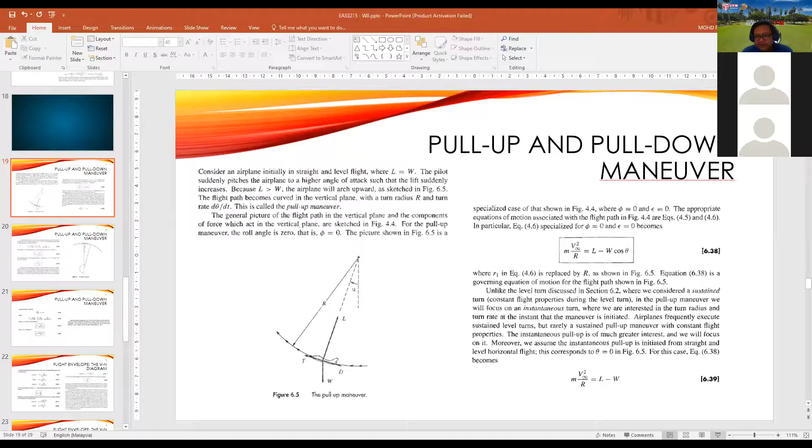Without further ado, I think we will proceed with my lecture. Okay, just to recap what we have before, what we covered last week - let's go back to the first slide.

In our last meeting, we covered level turn flight and pull up. I think pull up and pull down maneuvers we have not yet covered; we only covered level turn flight. For today, we will cover the other two parts, pull up and pull down maneuvers, as well as the VN diagram.

For the VN diagram, it is very, very important for you, not only to engineers but also to pilots who are planning to get a pilot license later on. If I'm not mistaken, two of your seniors, alumni from this program, became pilots - at least two that I know, one Chinese, one Malay. They took the pilot license, but I'm not sure if they ended up as pilots or as engineers - I lost contact with them.

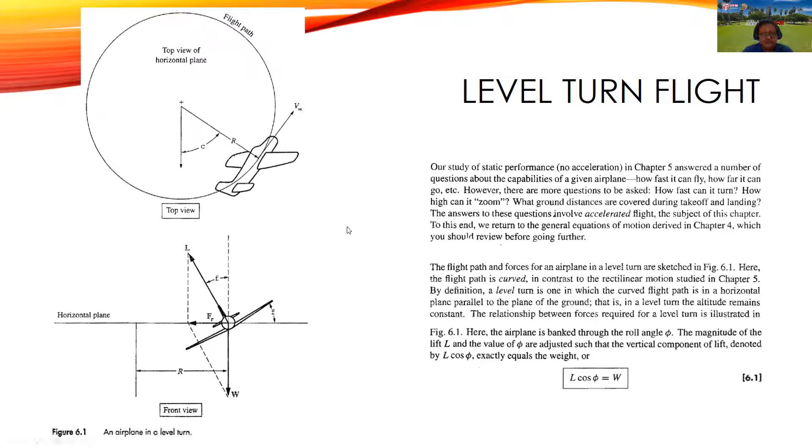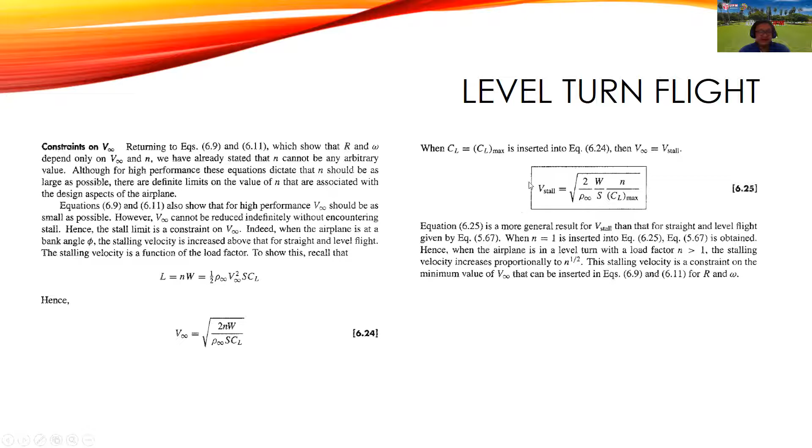Last week we looked into level turn flight - where the aircraft is turning without losing its altitude, meaning the aircraft is turning while maintaining its height. There are ways to determine the turn radius, the rate at which the turning progresses, the maximum load factor, and the minimum speed at that particular point. This is the V-stall.

Now we want to look into what we call pull up and pull down maneuvers. Consider an airplane initially in straight and level flight where L equals W. The pilot suddenly pitches up the airplane to a higher angle of attack such that the lift suddenly increases, meaning the lift is now more than the weight. Because lift is more than weight, the aircraft will arch upwards, going up in some sort of circular motion.

As we can see in Figure 6.5, the flight path becomes curved in the vertical plane. The altitude is increasing in this case because it's pulling up - the height of the aircraft with respect to the ground is increasing, with a turn radius of R and a turn rate of d theta/dt, which is also omega in this case. This is called the pull up maneuver.

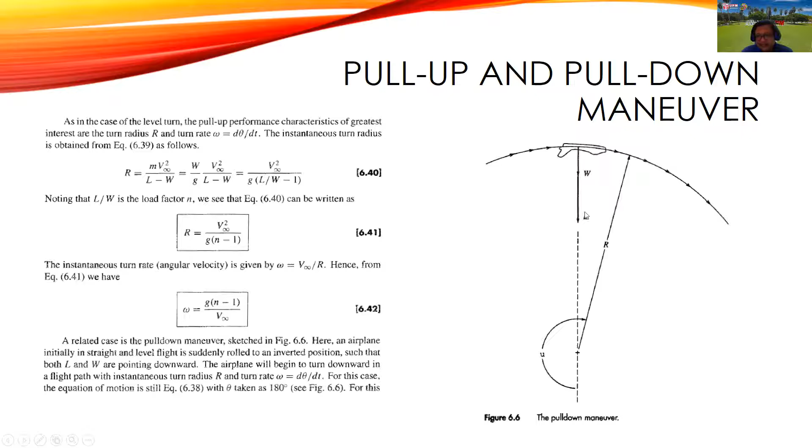This one is pull up. For pull down, this one is going down, right? The pull down maneuvers, the only change is the sign of N. Previously you see this is minus, N minus 1. But for pull down, if you work on it, because L and W are in the same direction, from here you rederive and you will end up with the sign here becoming positive, unlike the pull up maneuvers, which is negative.

As we can see before, when we talk about a level turn flight, this one 6.9, where was it? 6.9.

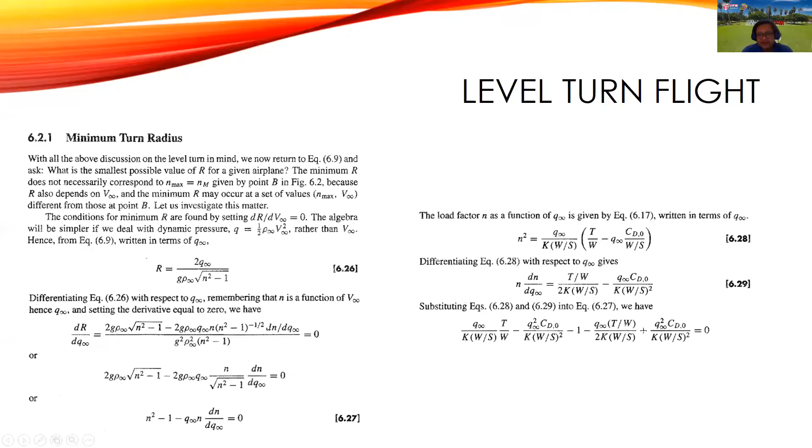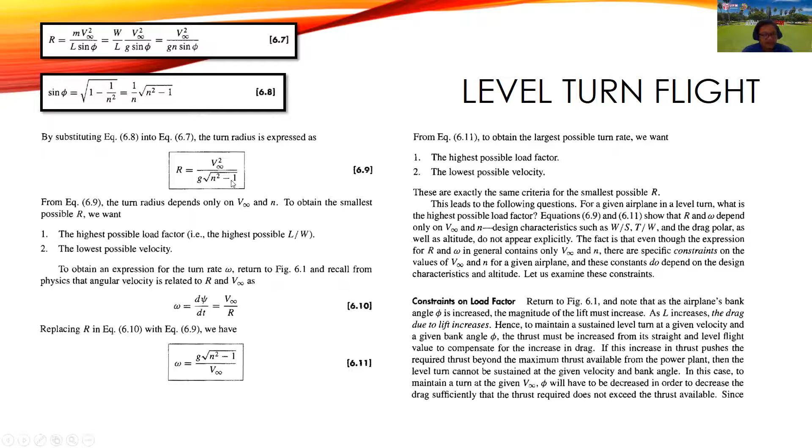Yeah, this one is for level turn flight. You have this equation, right? If you look here, n is to the power of 2, and you have a square root here. Okay, this is when you do the derivation.

But for this one, where is it? Okay, unlike the pull up and pull down maneuvers, you didn't have a square root and the power of 2. That is the difference between this and this one. And from pull up compared to pull down, you just change the minus into a plus sign.

Then in the limit of large load factor, these three equations reduce to the same form. If n is very large, it becomes very dominant, I would say. Probably the value is 8 or 9. So it doesn't matter whether you minus 1 or plus 1, the radius will not change that much. So you can basically simplify into this equation.

Similarly, consider the expression for turn rate for level turn, pull up, and pull down maneuvers as repeated here. This is for omega. Then, okay, level turn, pull up, pull down.

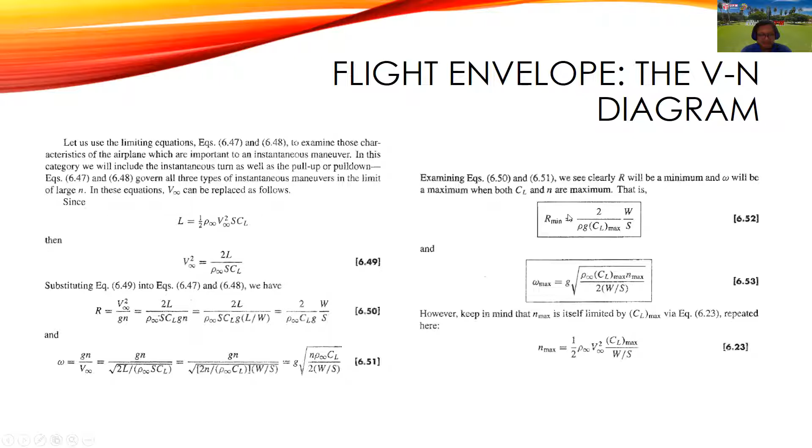Then, okay, now we want to move into what we call the VN diagram. This is nothing but on how to determine the minimum radius and also the maximum turn rate for that particular aircraft at that particular condition. Okay, when we are talking about the VN diagram, there are two things that I would like to highlight.

One is the limitation of the pilot himself or herself. Because we are human, we have blood vessels in our body, and when your body experiences a large G force, N is also G force, load factor, same thing. We're experiencing, let's say, a G force of 6, for example, or 9, then due to the inertia of the blood inside your vein, that will actually develop or make you faint, dizzy. At first probably dizzy, then finally you will lose control of your body and also the plane.

So that is one thing you must remember when designing an aircraft: you cannot simply design it to perform, let's say, n equal to 20. The load factor is 20. That is what we call over-design, because you don't need to design something that is way too much. That is a waste of money, waste of time, waste of effort. That is not practical, because a human cannot sustain more than 9 g-force.

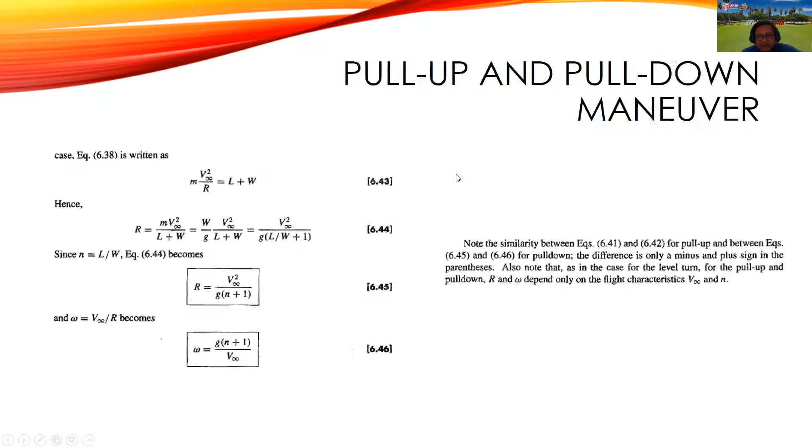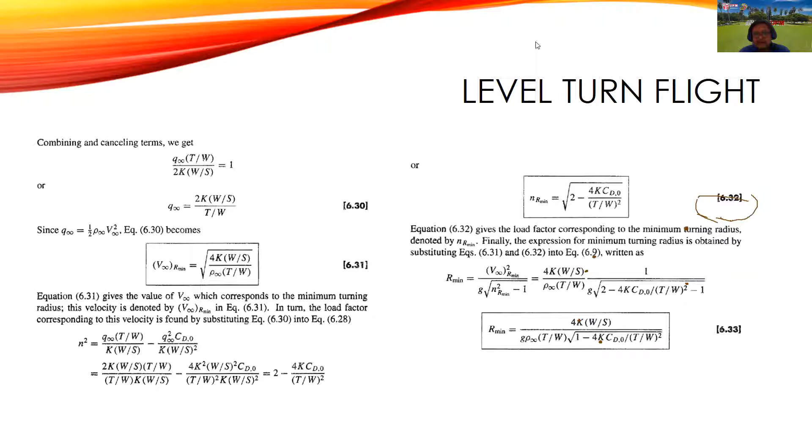Okay, that is the things for the V-n diagram. So that is the V-n diagram. I have a video here.

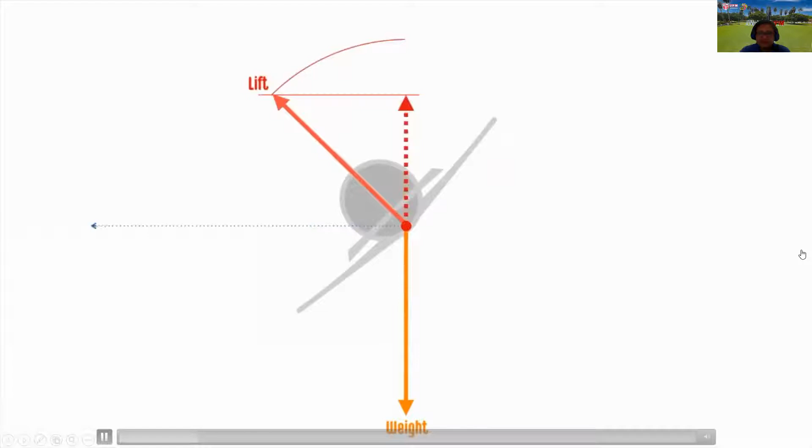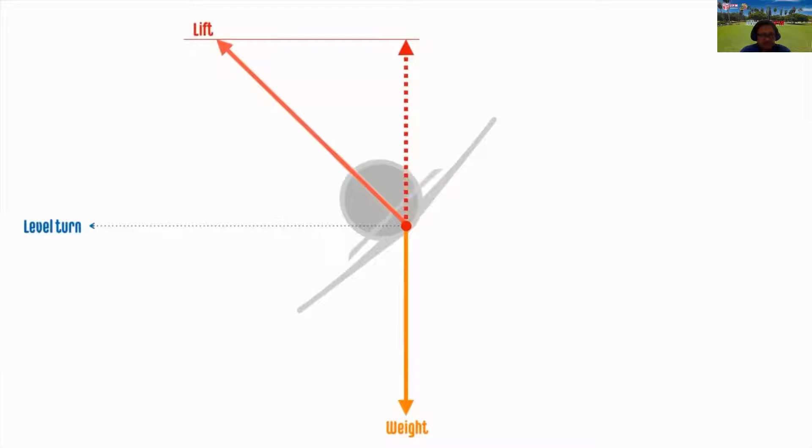In straight and level flight, lift equals weight and the load factor is said to be 1. In a bank turn, the vertical lift component that opposes weight is reduced. To maintain the turn without losing any altitude, the pilot must increase the angle of attack to generate more lift. This increases the loading on the wings and increases the aeroplane's apparent weight.

So in this particular moment, as I explained earlier, this is where your load factor acting on the aircraft is higher than 1.

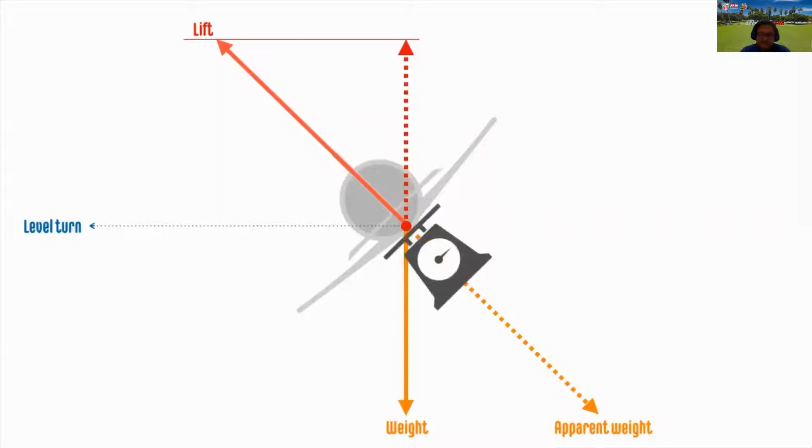So if you could put a scale under the aeroplane, it would show more weight. This is due to the centrifugal force acting on the aeroplane outwards from the centre of the turn.

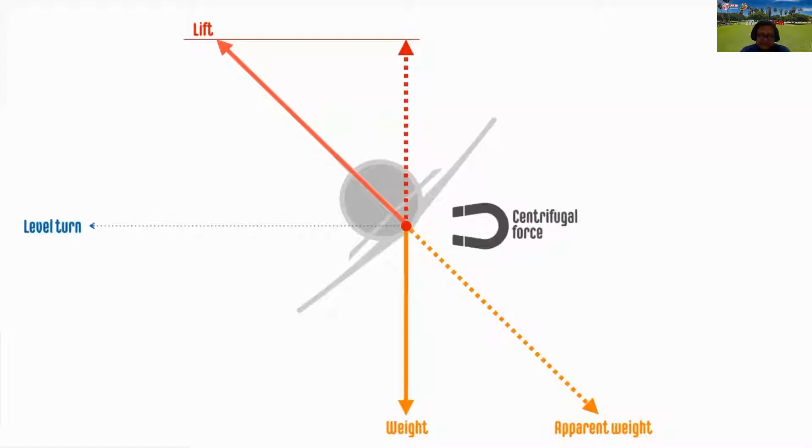No matter how fast or how big the aeroplane is, in a level and balanced turn, the load factor will be higher. How much higher? We can work it out using this formula. So at 45 degrees angle of bank, for example, the load factor is 1.4. The greater the angle of bank, the higher the load factor, and this increase is exponential.

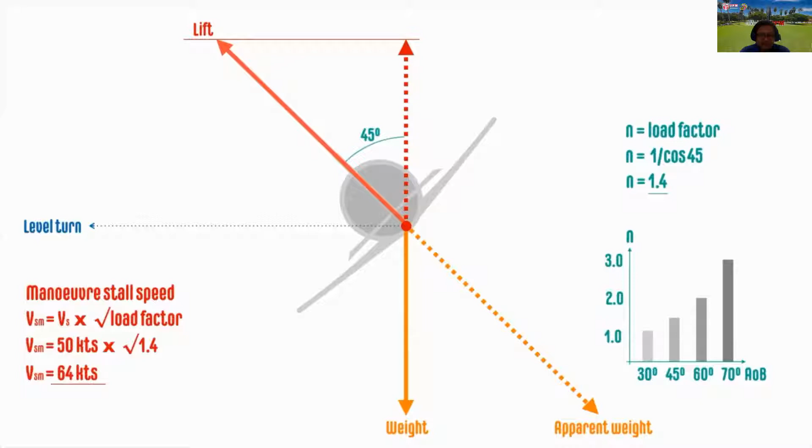It's important to understand that stall speed also increases with the load factor. How much more? We can work it out using this formula. For example, if the aeroplane stall speed is 50 knots, in a 45-degree turn, where the load factor is 1.4, the stall speed becomes 64 knots.

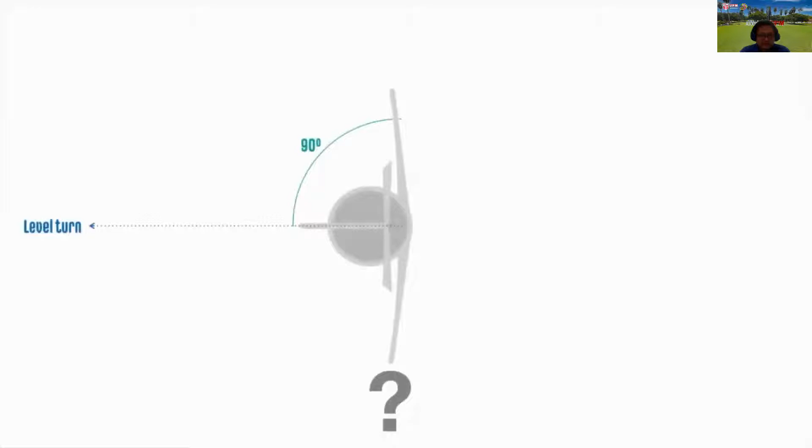What do you think happens at a 90-degree angle of bank turn? Please comment below.

Okay, that is a bit of the explanation about how you must know how the load factor is changing during this turning, whether it is a level turn, pull up, or pull down. The same concept is applied.

So it is nothing but just what is called the corner velocity. Another thing that I forgot to highlight is this point B here. This point B is actually the maneuvering point.

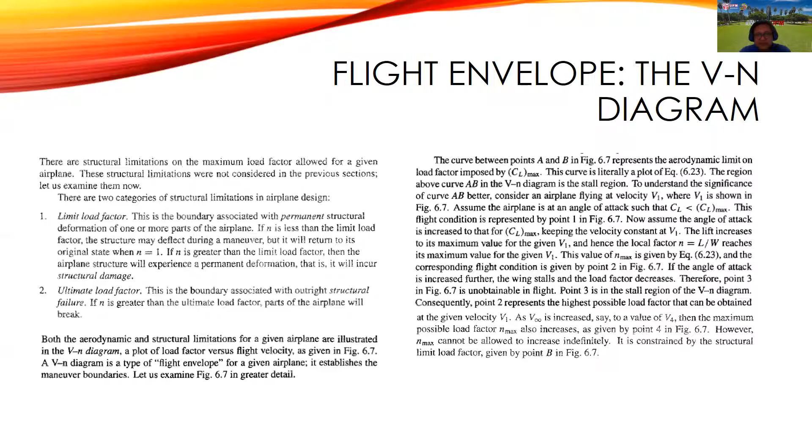I need to get the right names. I think on the previous one it is there. Yeah, maneuvering speed. Okay, this is point B actually, the maneuvering speed, this maximum point here. That is the maneuvering speed or maneuvering point, point B, this one.

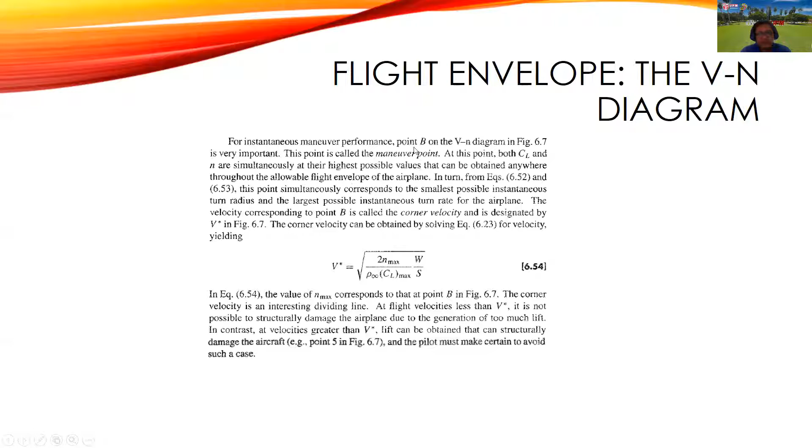Okay, this is another example. I think you can go through it. Yeah, this one, CLmax 1.2, just like what I have assumed.

So for this, this is a typical positive load factor and negative load factor for different types of aircraft. If you see normal general aviation, the positive load factor is around up to 4, okay, 3.8 or 4, something like that. And the negative load factor is about 1.5 at the maximum.

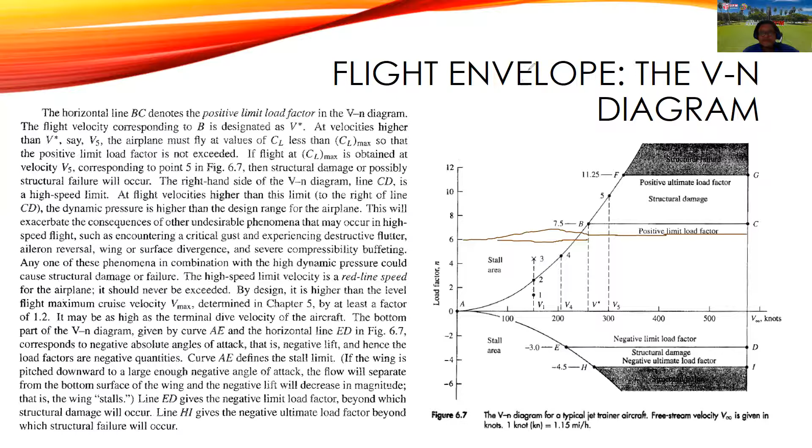The aerobatic general aviation is 6, and negative is -3. Okay, 6, -3, this one. If you look at this graph here, this line from B to C. For aerobatic aircraft, this BC should be aligned with this one, 6. It should be from here... there, 6. Okay, should be there.

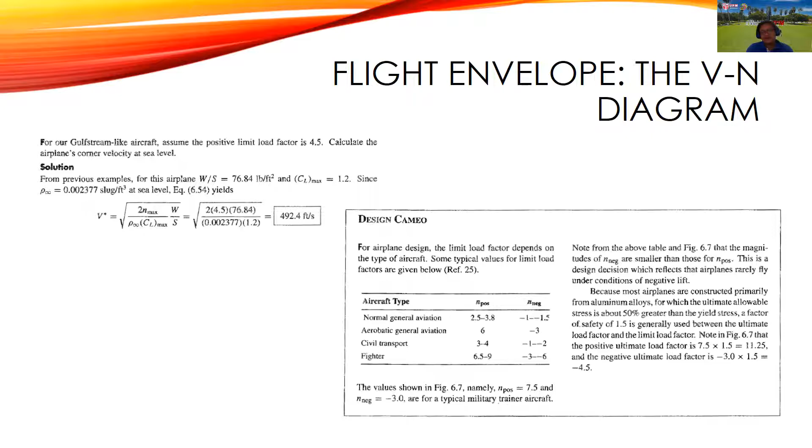Then for civil transport aircraft, about 4, and the negative is about -2. But for fighter aircraft, of course, the fighter aircraft need to perform combat maneuvers to avoid being shot down by the enemy aircraft. So the load factor is very high. The positive is up to 9, and the negative load factor is -6, or could even be more for the modern generation of fighter aircraft. I'm not sure, because sometimes they will not publish this data to us.

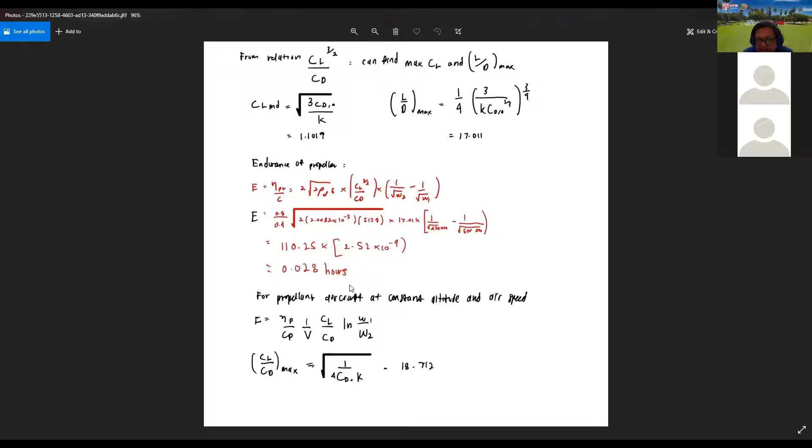You can share your voice if you want to explain it, no problem. And then L over D max. L over D max, 1/4.

Yeah, this one is correct. The right hand side is correct. Endurance of propeller. Okay. So what's the final answer? That one.

How did you convert the value of C? You cannot just simply put 0.4 like that. You need to convert it, you need to convert into seconds. You need to convert 0.4 for the specific fuel consumption. I think, or you have a mic problem.

But anyway, I think the first two parts up here, you are using this when you calculate 1.1019, that I think that's correct. And then you calculate the L over D max, that is also - the approach is correct. Okay.

The only comment from me is you need to double check the 0.4 here, down here. You need to convert it. I think when that is done, you should get a better answer. This is not correct. 0.028 hours, I think that is something that needs to be done. Okay, thank you, okay okay, thank you.

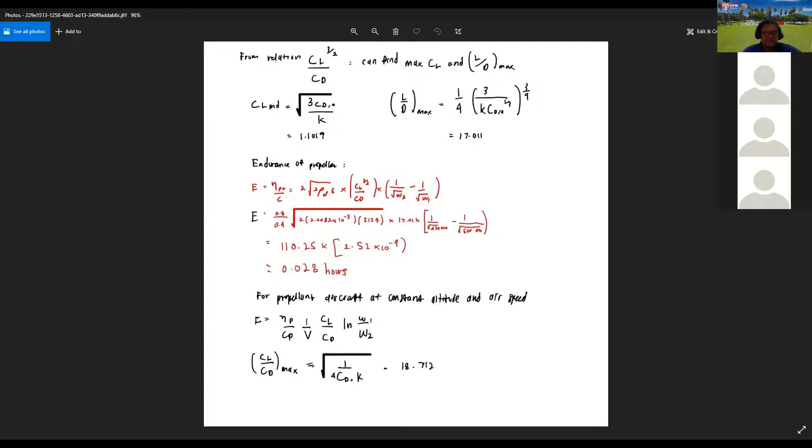How about the other, Adam? Doctor, for our team, we got about 8 hours for the first part and 6 hours for the second part of the answer, Doctor. Can you share it here? Do you have it? Sure, Doctor.

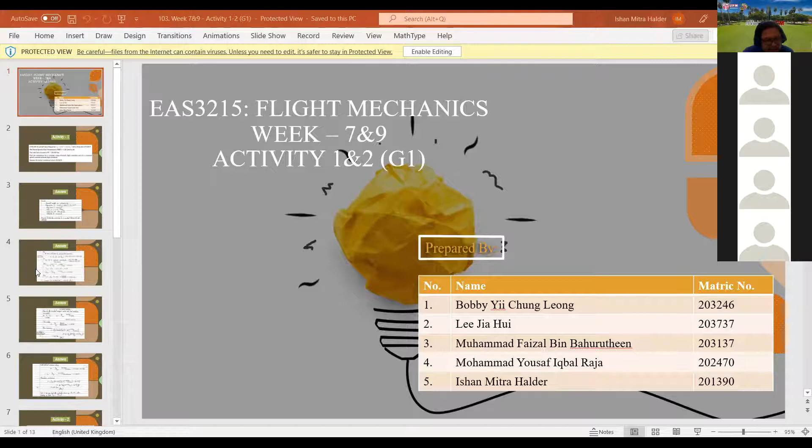Okay. Doctor, this is the changed value. Yeah, yeah, so I'll just skip.

Here is the conversion for the specific fuel consumption, Doctor. So we are a bit weak in the metric system, so we converted it to the standard units first, and then finished the conversion, and then came back to the metric unit again. So, Doctor, for 1 pound per horsepower hour, we can convert it to kilogram per kilowatt hour.

Okay, if we just multiply by this number, and then from kilowatt hour, we can convert that to Newton meter per second by dividing with 1000. And then after that, from kilogram per Newton hour, we can just multiply it by this value to get it back into the metric system unit, the pound per pound force hour. Okay, so that is what we did in this calculation, Doctor.

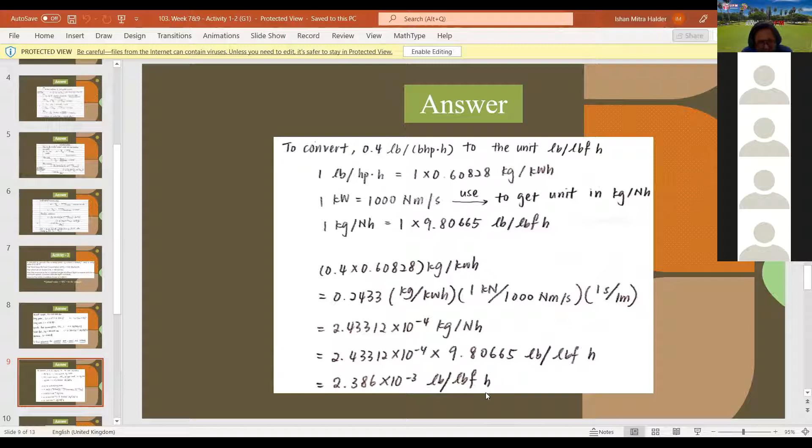From 0.4, we just followed this whole procedure, and then we got 2.386 into 10 to the power minus 3 pound per pound force hour. Okay, and when we just applied that to the equation, Doctor, for the first part we got 8.2357 hours, and for the second one we got 6.6007 hours.

Okay, I think that makes sense. Okay, that makes sense. Okay, I think what you have done here...

CL over CD. Can you go to the previous part? Yes, Doctor. How do you calculate CL? Sorry, how do you calculate CL? Oh, this is by following the equation that Doctor provided us, and not the previous one.

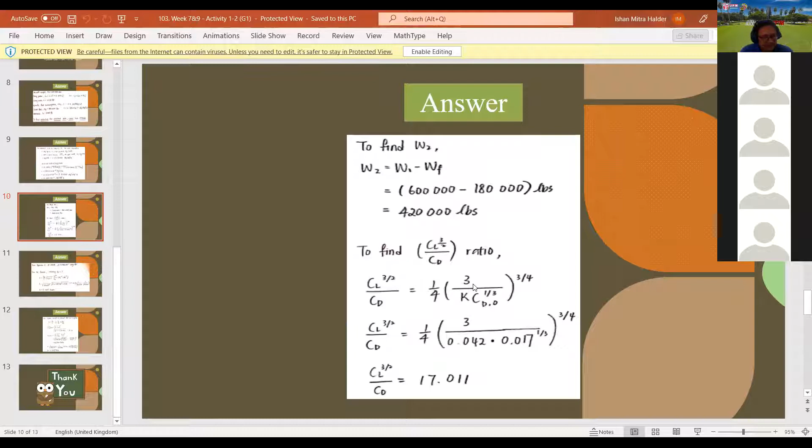Okay, so you did 1 by 4 into 3 by... That's correct. Then how about you calculate for the other part? CL to the power of 3 by 2 over CD? Did you use the same?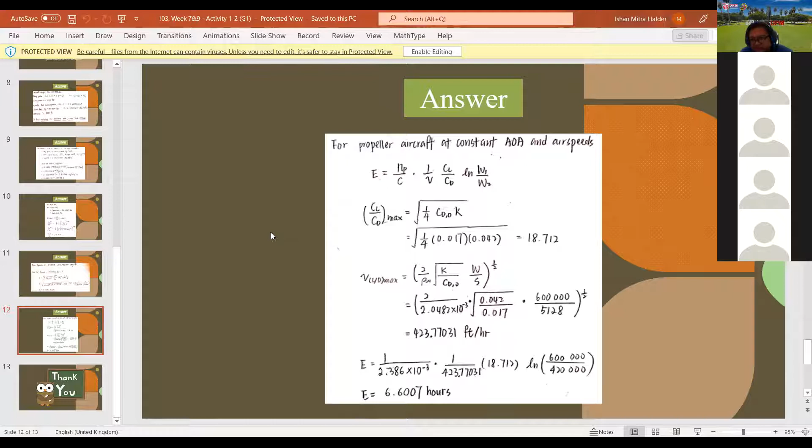Doctor, actually for this equation, they only provide the main equation that says CL by CD, so that is why we went with this equation. This one, Doctor - I don't think this one is for propeller aircraft. Can you double check? Because for propeller aircraft, the equation for endurance is different. Okay, Doctor, then I'll double check, Doctor.

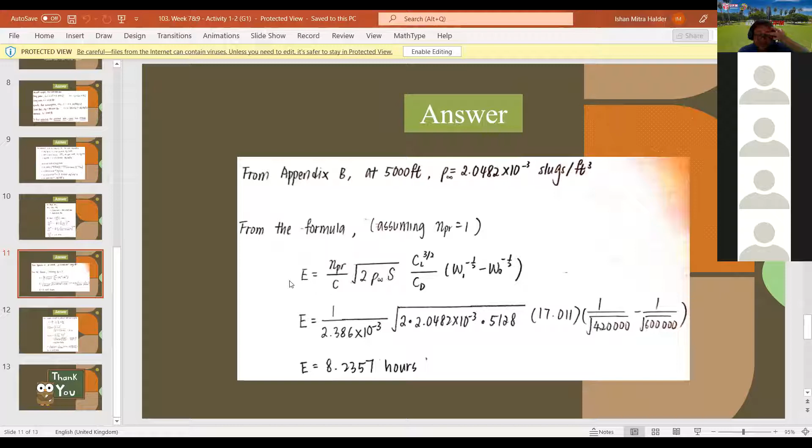Yeah, but this one is correct, right, Doctor? This one is for propeller. Yeah. Can I share mine? Sure, okay.

You need to use this one, this equation for the endurance, this one. Okay Shan, I hope you can see this. You need to use this equation to calculate for the second part too, because for the second part, Doctor, it says constant AOA and constant airspeed - one is constant airspeed and one is constant altitude, so I thought that there will be two different equations to solve.

I think you should maintain with this one. I will double check on that. But I think you have to use the same equation.

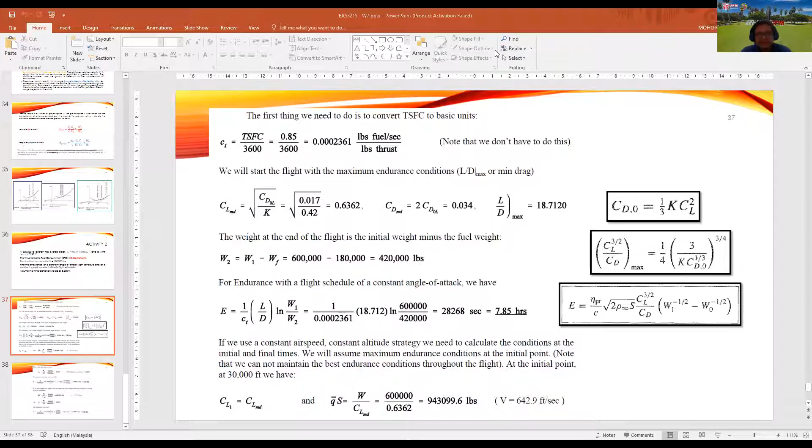Okay, anyway, so that's very good. So we finally arrived at almost the right answer. Even though just one minor update on that part. So congratulations, you have finally managed to solve the problem.

Sometimes that's why to understand the derivation is very important. Otherwise, you are in the dark. You don't know which equation you should use to determine the CL, for example, and which equation you need to use when you want to determine the other parameter in that particular formulation or problem.

Okay, without further ado, I will share with you the recorded videos by Prof. Filippone. He actually was supposed to share his presentation during the AROS conference on the 12th of December.

However, due to there was my mistake as well, due to our lack of communication, the time, because it is like this. If you compare the time difference between here in Malaysia and the UK, sometimes in the year it is 7 hours, and sometimes during the year it is 8 hours. That is what we call daylight saving. Especially during winter time, the time difference is 8 hours, not 7 hours. So due to that, we have a problem.

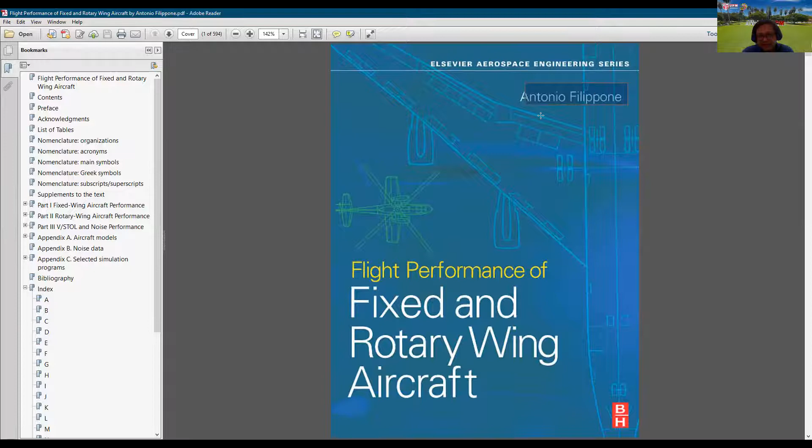Before I proceed, I think I should tell you who he actually is. He is the author of this particular book, Flight Performance of Fixed and Rotary Wing Aircraft, Professor Antonio Filippone. This is a book by him on aircraft performance. In this particular book there are two parts: one about fixed wing aircraft, and the other part about rotary wing aircraft, which is like a helicopter, or you can relate it to a drone as well.

Okay, let's continue back on that part. Sorry, interrupt you on that part.

Particularly on aircraft noise, is an area on which we're doing a lot of research. Can you hear the sound? Yes, doctor. Okay, thank you.

So to give you an introduction, I'm going to talk to you about a historical perspective of aviation. 100 years ago, what you needed was capability. So you needed to show that your airplane could fly faster, could fly longer, it could carry more payload. Later on, say after the Second World War, the focus was on commerciality, meaning trying to make money from your aircraft operations. And so there was an expansion of both passenger traffic and freight traffic, which peaked in 2019. The current focus is on sustainability, because aviation has expanded so much and emissions are so high profile that the concept of sustainability is in fact a question of the survival of the entire industry.

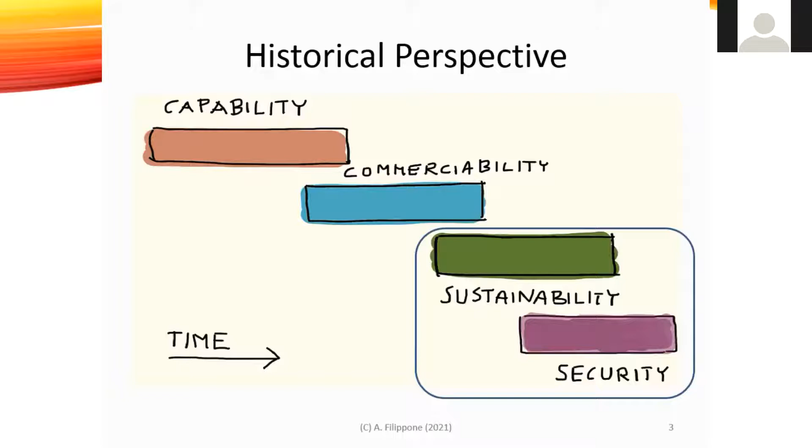So just to indicate what my talk is going to be about, again within the area of sustainability, is on aircraft noise. The presentation will have essentially two parts. Part one is looking at the noise context and the noise measurements at the airfield, and part two will be on trajectory management and trajectory optimization. Since my talk is obviously restricted in time, I cannot talk about the simulation methods, which will be a different subject. I will draw some conclusions and a summary out of these two parts later on.

So let's look first at the noise context. In a recent academic paper I read, it appears that if we had no ears, then the subject wouldn't be that important.

The issue is that people respond differently. There's a behavioral response and also a physiological response. In terms of behavioral response, there are disturbances and effects of annoyance. The whole concept of annoyance is central to the issue of aircraft noise.

From a noise perspective, you have people actually complaining, and there are various ways of complaining. Physiological aspects have been considered by people working in public health. That's not my subject at all, but I want to mention there is biological response like hypertension, loss of hearing, and a number of other aspects on which there is a lot of technical literature out there.

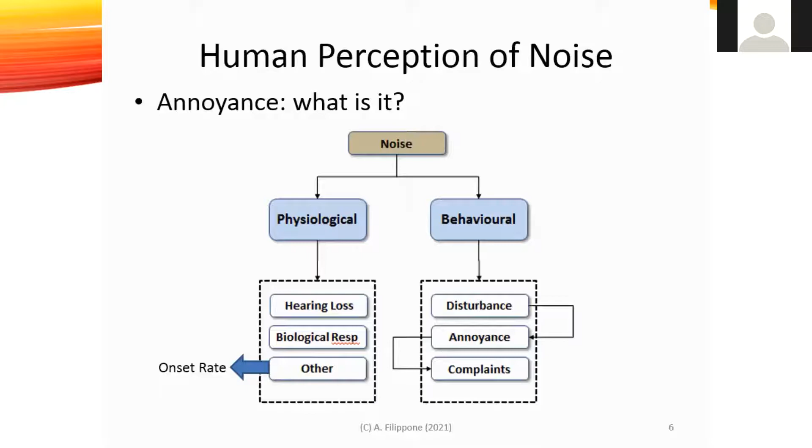We started in the 1970s with the first sort of attempt to certify aircraft noise, due to complaints on the ground about the presence of supersonic aircraft, called the Concorde. That airplane is not flying anymore, but we know people were complaining in New York.

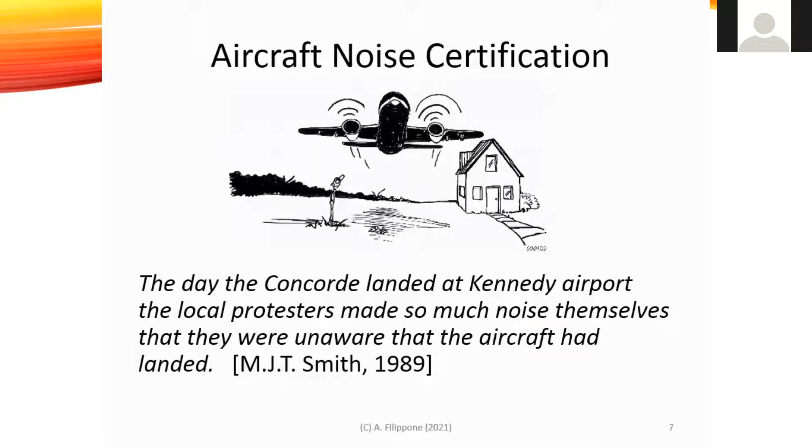This is an anecdote told to us by Mr. Smith in 1989, who was involved with the first generation of aircraft certification procedures. People were complaining about noise, and they didn't even hear that the aircraft had landed. So you see, it's very self-centered, and you need to take into account that we ourselves as humans also create a lot of noise.

Obviously there are nowadays airport noise restrictions and regulations all around the world - about 600, maybe 650 airports that have some form of noise restriction. There are certification requirements, for example from ICAO and various other international organizations like the European Aviation Safety Agency, EASA, based in Germany, covering flight performance, design, and operation.

Now ICAO these days recognizes that you cannot just do one thing to reduce noise, and they take a so-called balanced approach. This means you do noise reduction at the source - looking at noise sources, something I'm not able to talk about today because it takes too long. There would be improvements in land use around airports, optimal flight procedures, which I'm going to discuss shortly, and finally the restriction of operations.

These restrictions are called quotas. There's a concept to assign a quota to each aircraft depending on its category, and each airport is assigned a quota they cannot exceed during a 24-hour period. That means if you have, for example, 100 airplanes of a mixed fleet taking off and landing over 24 hours, you cannot add another airplane unless you can demonstrate that noise is reduced somewhere else in the whole operations of that airport.

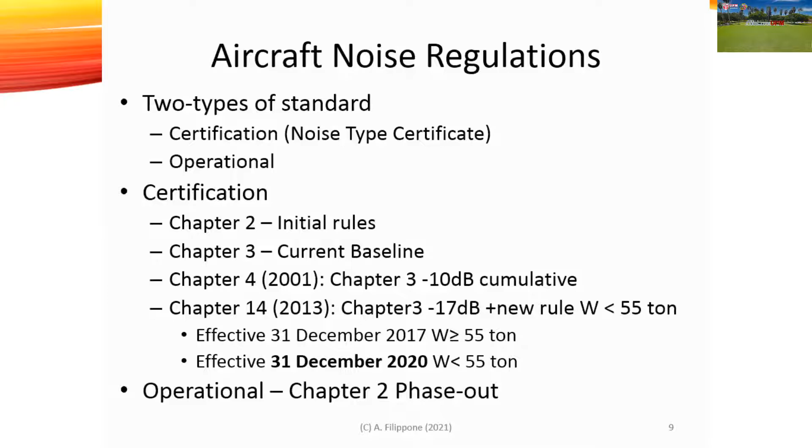So if you have an airplane certified under Chapter 2, those airplanes will not be allowed to fly anymore. We're talking about the first generation of jet airplanes, of which there are very, very few flying around the world. So Chapter 2 is now being phased out.

Now, how do you actually measure noise? As I said, this is all psychological. You can't just make up a number. Certainly measuring noise with a sound level meter, as I'm going to explain in a moment, is just not enough.

There may be cases where you have some local increase in noise after a certain time. At the point where you have the maximum, essentially the airplane is overhead if it's flying at low speed and low altitude. It will not be exactly overhead due to Mach number effects if it is flying at cruise altitude.

The point is that now you have a signal that you have measured, and out of the signal you need to be able to draw some sort of metric, which we call an integral metric.

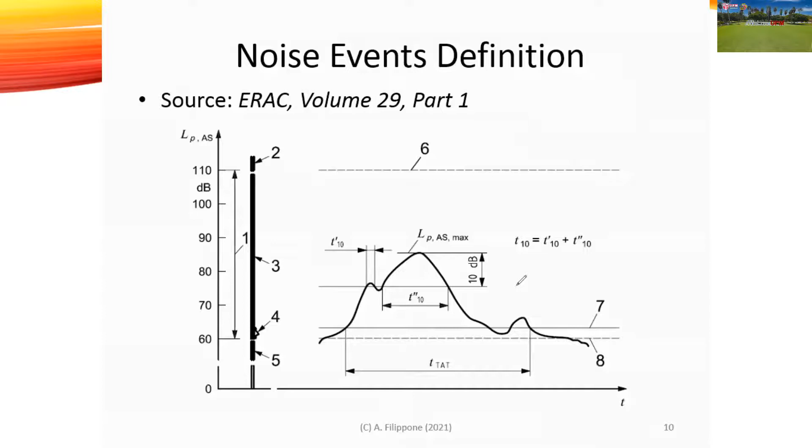Then you have DNL, day and night average sound level. This is an integral metric which essentially takes into account the number of operations either over the 24-hour day, or over the daytime given as 7 in the morning to 23 hours, with nighttime between 23 hours and 7 the next morning.

You can actually measure the effects of night flights or daytime flights, and a number of other measures which I'm not going to discuss here. So I just mentioned the PNL, the maximum perceived noise level, which is part of the operations required to construct the EPNL.

There are other things like TAUD, which is time audible. That depends on what the background noise is. If you have a very high background noise, for example in the middle of a busy city, you have background noise of the order of 70 dB. So any flight around 75 dB is not really audible, since anything with a 10 dB difference is perhaps not very important.

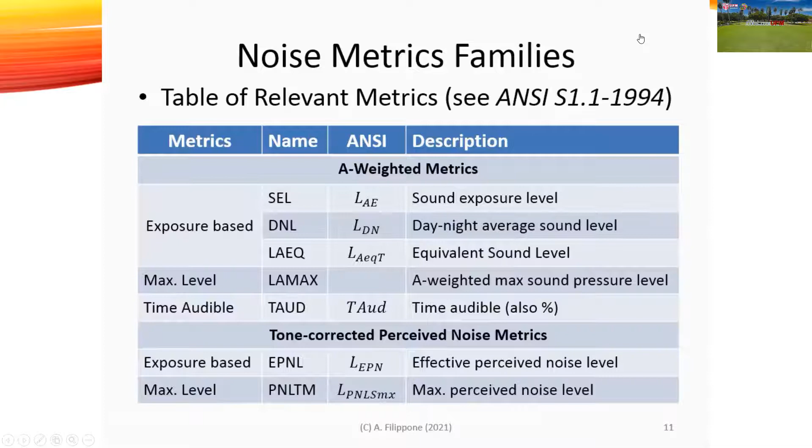There is a very strange thing with acoustics: the sum is obviously not linear, it's logarithmic. So you get some strange results when trying to sum the effects of multiple sources. Clearly, on an aircraft, you have sources from various systems - in case of landing, you've got the landing gear, the flaps, the slats, the wing, the engine, and the engine will have several components and so on.

So the way you sum the noise is through this log sum. Basically, what you need to do is go back into decimal scale, then sum, and then come back to the log scale. This produces some very bizarre effects.

For example, if you have 3 noise sources of 90 dB each, the sum is 94.8 dB - not 270. And another very bizarre thing is that if you have 3 noise sources of 0 dB, 0 plus 0 plus 0 is not 0, it's 4.8. This is what happens in the case of log sum.

Now, I need to be careful about what I say, because only sound pressure level can be summed. EPNL values cannot be summed, because EPNL values are already integral metrics. So this has to be clear: only sound pressure level can be summed. Log operations are very tricky - they're not very intuitive to grasp, but these are important concepts in all aircraft noise.

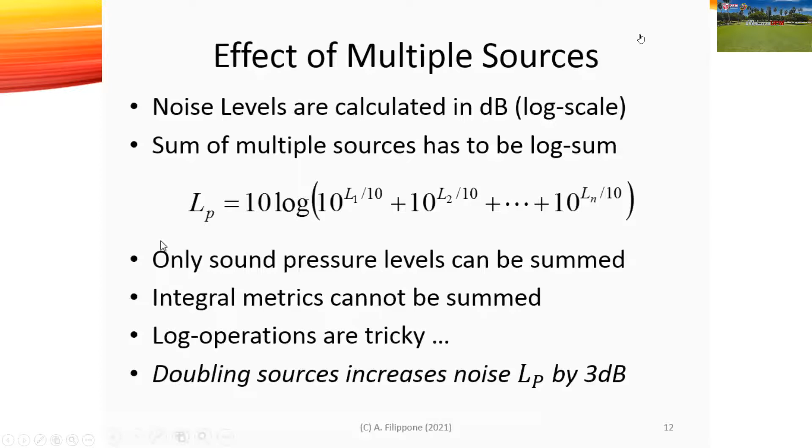So let's look now at measurement considerations. Now, the problem with measurements is that if you want to take measurements of aircraft noise, you have to be outdoor, and that's very different from being in the lab. The lab is an ideal situation - very controlled, very repeatable. If you're not happy with the results, you can repeat them again and probably get almost the same numbers.

So what you have in the lab is known acoustic sources and repeatable experiments - everything is nice and clean. When you're measuring aircraft noise, you are inevitably in an open field where it is uncertain, uncontrollable, subject to random events. And of course there will be the weather, depending on where you are. Here in the UK, you've got to consider the presence of wind, rain very often, heat not very often, but cold, birds, or the noise.

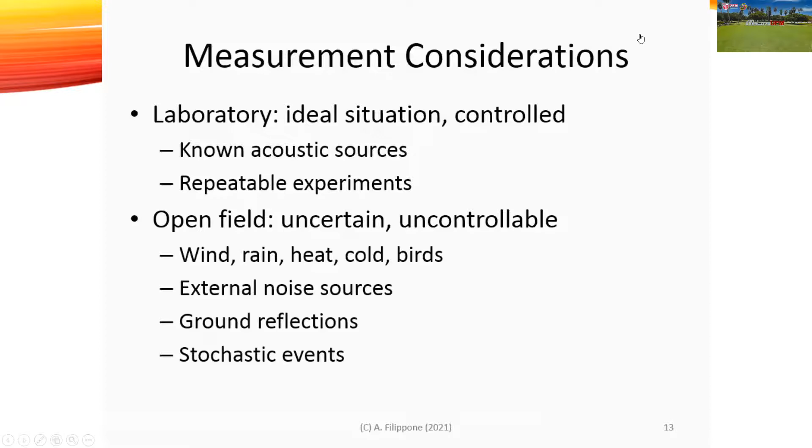For example, external noise sources - you've got ground reflections, stochastic events, various sources that will cause a sort of background contamination of your source.

Each noise source has its own characteristics in terms of peak, duration, and frequency. Some modern systems have a built-in clever system, not quite artificial intelligence, to screen out unwanted noise. It's easy to discard community noise because it's a random event lasting maybe a second or so.

We know an aircraft event lasts about a minute, depending on whether it's takeoff or landing, maybe 45 seconds to a minute. Anything lasting less is probably contamination in your system. Trains, for example, give a very high and sharp increase in noise, but only for a very short time.

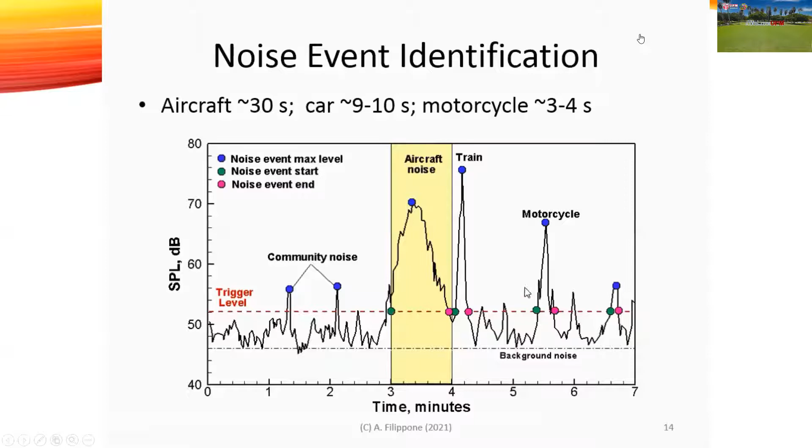For airport noise measurements, if you're on approach there are three measuring points: approach, lateral, and cutback or flyover. The approach point is essentially 2,000 meters from the runway threshold. The cutback is essentially 6.5 kilometers, or 6,500 meters, from the brake release point. The lateral point is basically 450 meters to the side, on the takeoff side of the runway.

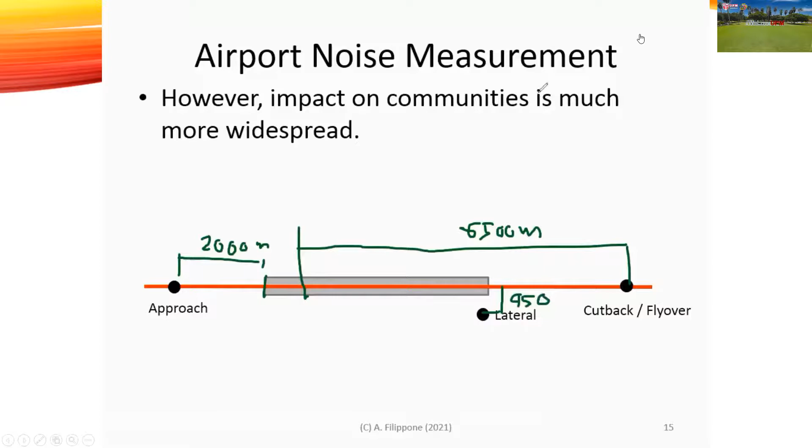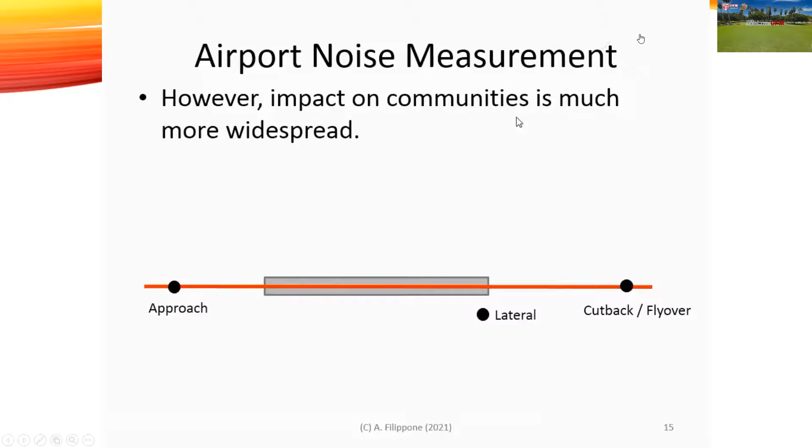This is required for certification, but the reality is that communities are all around the airport, placed in any location you can imagine. You have these colored urban areas where people live, and they hear noise which is not exactly the same as what gets certified.

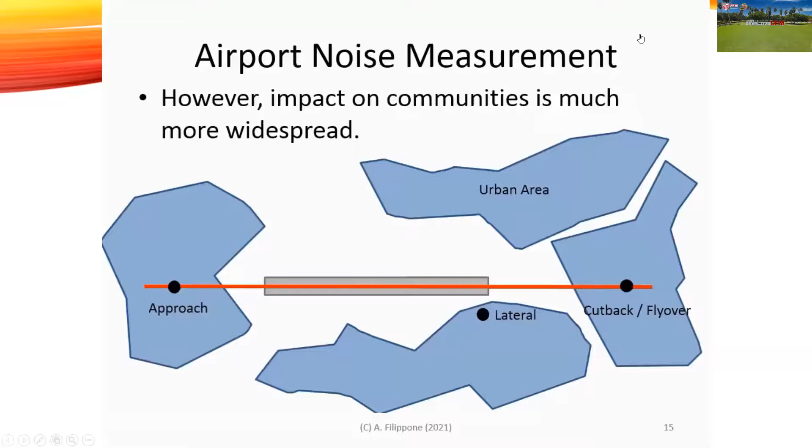Ideally you'd place measurement devices all around the airfield, at scales of several kilometers in each direction, but this is totally impractical.

Many airports around the world do noise mapping, drawing iso-noise contours to tell surrounding communities the noise level they should expect if they live in a given area. I'll show you shortly an example of a simulation we do here in our research.

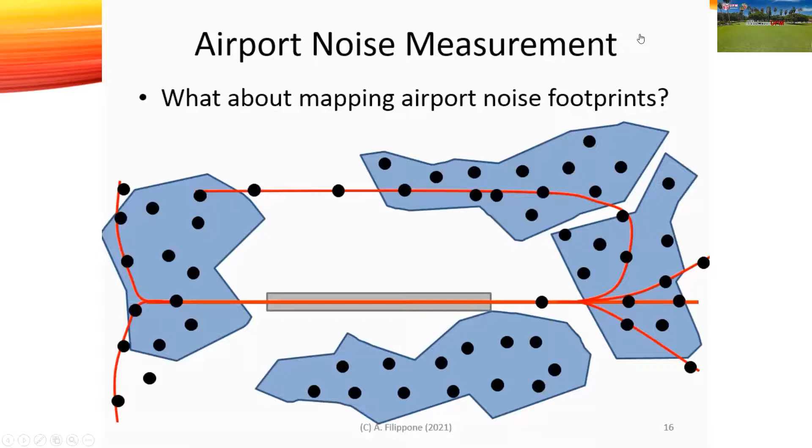This graph with the distribution of microphones isn't realistic at all, so we need to resort to simulation, producing what's called noise mapping or noise footprints at airports.

In the UK, airport noise measurements are done automatically using the so-called noise and track keeping system. There are ground measuring stations that are unmonitored, with data captured automatically and extracted remotely from an office at the airport, sometimes supplemented by handheld measurements.

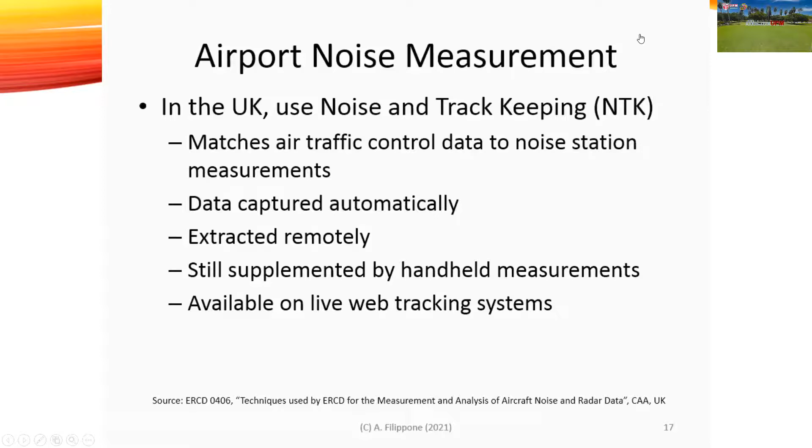If you go on the web, for example for Heathrow Airport and perhaps some others around the world, you can see live noise levels, telling you which airplane is flying at which moment and what noise is measured at each community noise microphone.

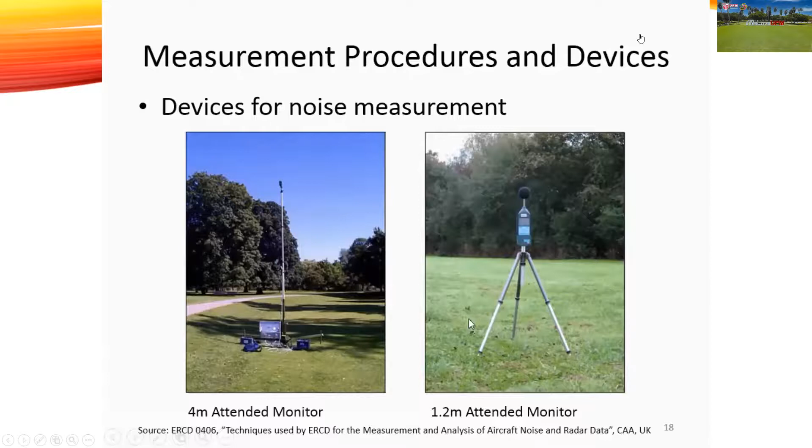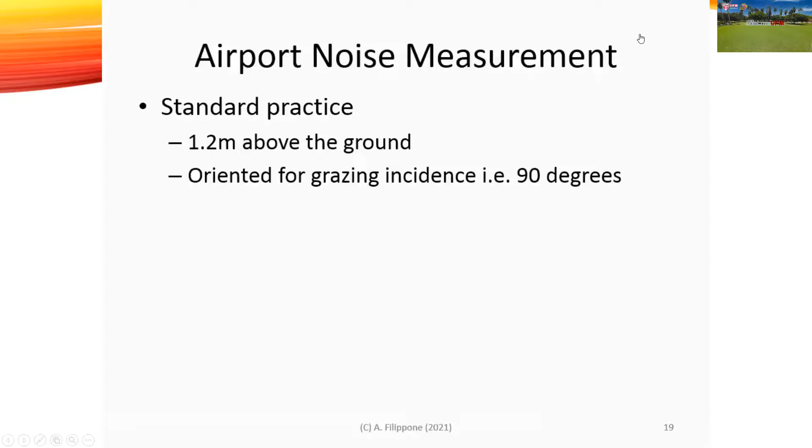It's normally placed horizontally 1.2 meters from the ground. This is what the regulations require. So the standard practice is to have it 1.2 meters above the ground in order to do airport measurements. They're oriented horizontally for grazing incidence to avoid effects of directivity.

It's calibrated using a 1 kilohertz sound at two noise levels, one at 94 dB and another at 114 dB. When you do this, you need to note the atmospheric conditions and the GPS location where you're placed. The atmospheric conditions means wind direction, temperature, and relative humidity. This is important because noise propagation depends very much on that.

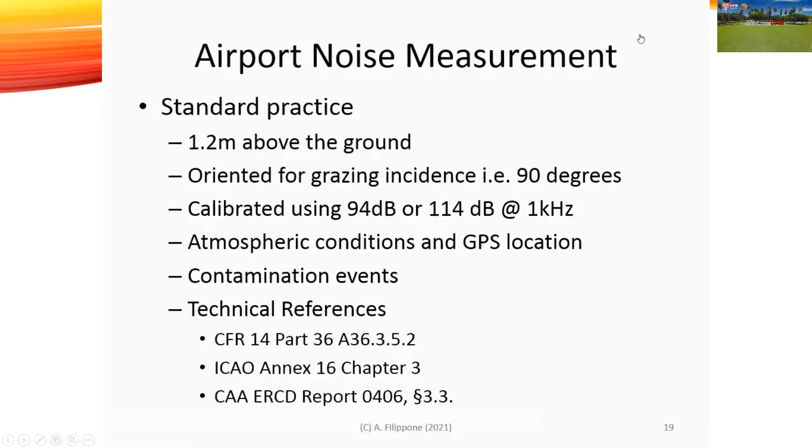Clearly, take note of contamination events - if there is a train, if there is a car, if there is anything around there - just to make sure that nothing is contaminating your event. There is a lot of technical reference on this, given here. If anybody is interested, just get back to me. I would be happy to give further information.

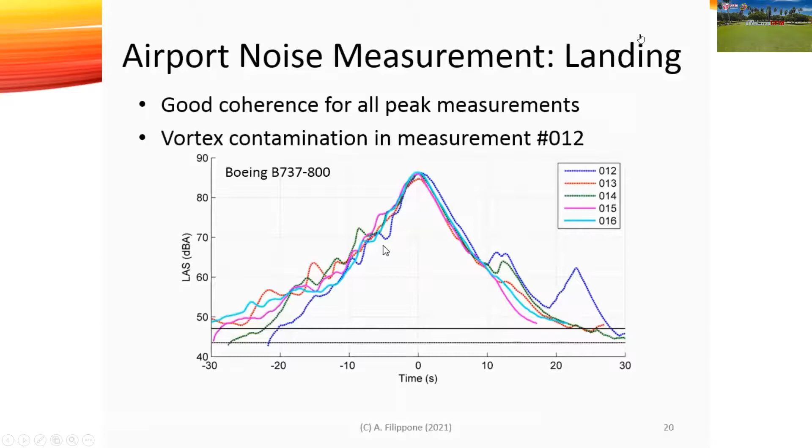So let's go on to part two, which is trajectory management. There is a lot of research on trajectory management - I'll just give you a few examples. So the problem is this: you need to design a safe flight trajectory. Safe means you can do all the optimization you like, but essentially you need to comply with all the flight safety for the airplane, for the airport, and for international regulations - to minimize noise, subject to minimum exhaust emissions, and subject to being on time.

You cannot just minimize noise and then go around and add 2 or 3 minutes to your flight, because adding 2 minutes to your flight adds time, adds cost, and ultimately adds to operational difficulties. So you cannot just minimize cost either - you have a lot of other things to consider. So if you basically go into preparing an optimization problem mathematically, you find two competing goals, and these competing goals will lead you to a Pareto front on which you need to make a choice whether to choose an operational point which will give you minimum noise or minimum exhaust emission, and so on.

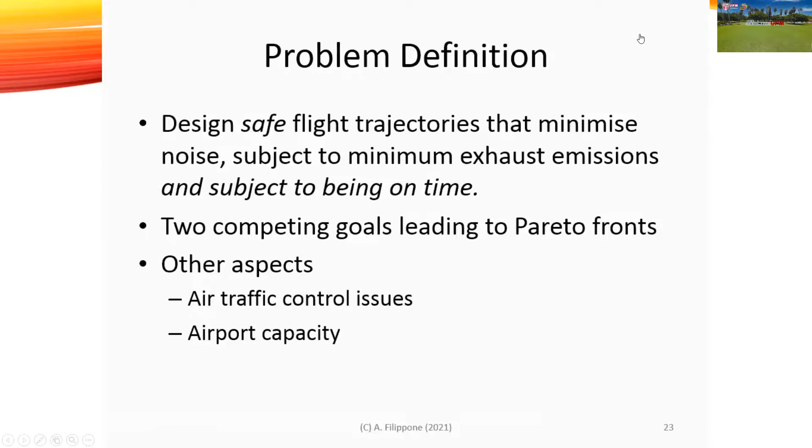So I'll just give you an example of some trajectories, etc. Other aspects you need to consider are aircraft control issues, air traffic control issues, and of course the capacity of the airport. I mentioned before the balanced approach. Of course, improvements in land use.

This is quite interesting because there are very few airports around the world built on artificial islands. I think there are about 6, as far as I know. There are 4 in Japan: Kansai, Kobe, Nagoya Centrair, and one of the main airports in Tokyo, Haneda, is also on an island. It's not an artificial island, but the island has been expanded, so part of it is artificial, so we can call it almost an artificial island.

And a few others around the world. I know there is, for example, one in Turkey, and another is Macau. Macau is also an artificial island. So this is the interesting thing.

But clearly, as I said, there are only 6 airports around the world, as far as I know, could be perhaps one more, where you don't have to worry about noise. Clearly, you cannot do this in most of the world, where you have thousands and thousands of airports.

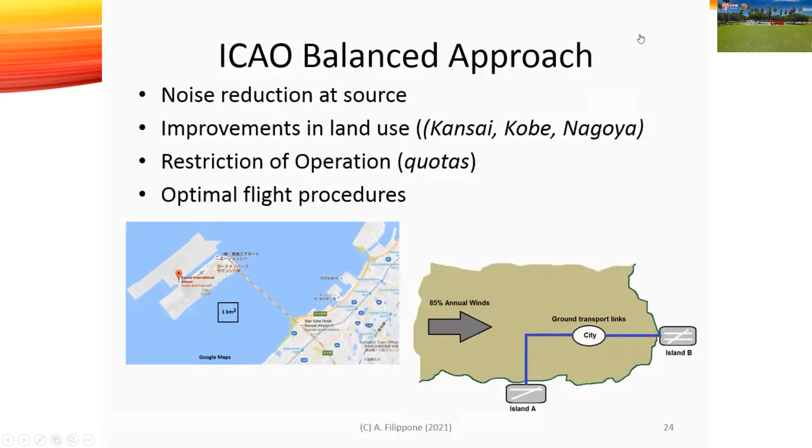Unfortunately, what happens is that we have a very busy airport to the west, which is London Heathrow, and this is just where the airport shouldn't be. But that's where we are, and we can't move the airport, and we can't move the city. So this is the situation as it is. We can't afford to do like we do in Japan, and just build airports on artificial islands. But just a bit of food for thought, if you want to think about where to put an airport, or where not to put a new airport.

So let's look at the role of airport management. You've got noise on the airfield, particularly ground noise, which is actually quite annoying. You've got taxiing in and out of the gate, and dispatch procedures. For example, the airplane sometimes has to taxi for several minutes. To reduce noise, you want to minimize the time to the gate. So once you have landed, you want to get to the gate as quickly as possible, also to save fuel. And in my opinion, large airplanes have dispatch priority.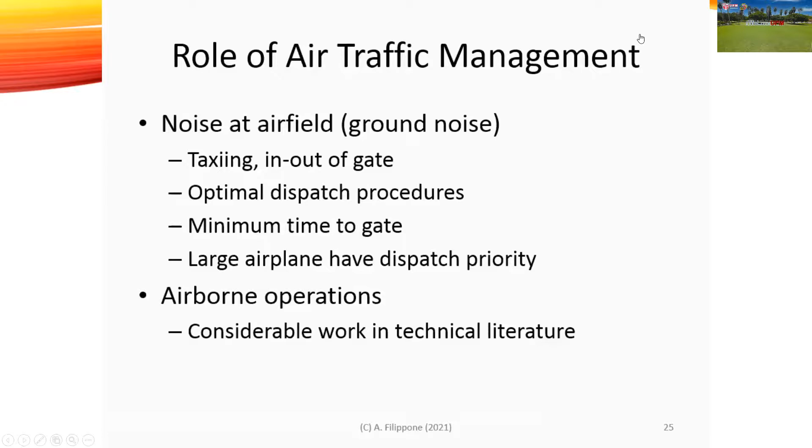Now, it might sound obvious, but in many cases it is not, because when you look at taxi times at very big airports, large airplanes have very, very large taxi times. There is a lot of work on airborne considerations, and of course there is technical literature. I need to just move on to this, but if anybody's interested, just get back to me with the questions.

Trajectory optimizations, you can do all sorts of things these days. You can look at arrivals, takeoff, lateral noise. There are a number of procedures which have been tried, and some of them have actually been applied at very many airports around the world.

For example, continuous descent is one procedure. Steep descent is another, where the glide slope is greater than 3 degrees. 3 degrees is normal for commercial airplanes. Some airports, like London City, require airplanes to demonstrate a glide slope of 5 or 5.5 degrees in order to be allowed to operate from that airport.

And finally, there is a displaced threshold, where airplanes on landing are allowed to land farther away from the runway threshold in order to decrease noise on communities on the landing side. You can also basically do a runway alternation depending on the winds. For example, if you have 85% westerly winds and 15% easterly winds, you can alternate the direction of takeoff and landing.

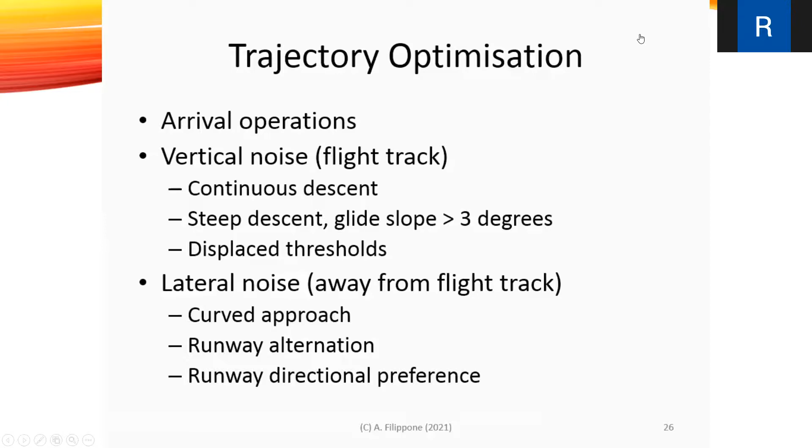This, of course, is not something that can be done on the minute. It has to be planned in advance, maybe several hours in advance, in order to allow pilots to replan their arrival and departure trajectories. And there are, of course, the runway directional preferences, as I said, either westbound or eastbound, northbound, southbound, and so on.

Departure operations are actually quite a few. Some of them are called NADP, which is Noise Abatement Departure Procedure 1, Procedure 2, then there's an ICAO Procedure A, Procedure B, and other procedures. Some of them are being codified. For example, the Federal Aviation Administration has these abatement procedures codified in a technical document, which is listed here.

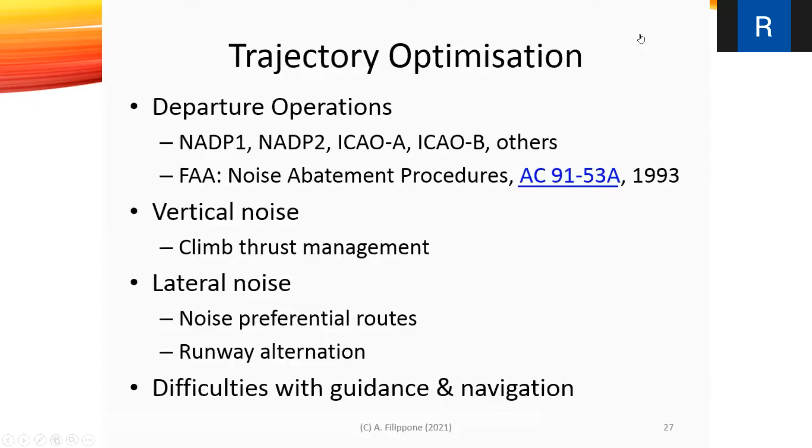So just to push forward on this point, let me show you what is the case of noise abatement. What you have is a brake release point here, and then you have a takeoff. The takeoff distance, by the way, depends on the airplane, depends on the weight. So the takeoff can be here, can be there. Essentially, this is just a generic situation: takeoff at point A, then you use takeoff thrust up to point B.

At point B, you reach an altitude, say 800 feet, and a speed which is the takeoff speed plus 20 knots. At that altitude, there is a cutback in thrust. The airplane maintains speed, but with lower thrust, until it reaches point C. Point C is 3,000 feet. At that point, there would be so-called climb thrust. What they need to do is just to guarantee there is a minimum climb rate, which, as far as I know, is 4 degrees.

Now, if you have been flying, perhaps not recently but before the pandemic, you ever felt a bit of unease the moment you seem to be climbing very fast, and all of a sudden the airplane seems to be stuttering, reaching a certain altitude. If you had that feeling, it's because you are at the situation here where at 800 feet the pilot has decided to cut down on the thrust.

And the reason why it does this is that if you have a community on the ground, houses, and people, schools, etc., you want to reduce noise, and the way to reduce noise is to use lower thrust as you pass over them. Then you increase thrust again, and you keep climbing. This is one of those procedures, and it's called NADP1, or Noise Abatement Procedure 1. There are other ones, but just to get an idea of what can be done on the operational side.

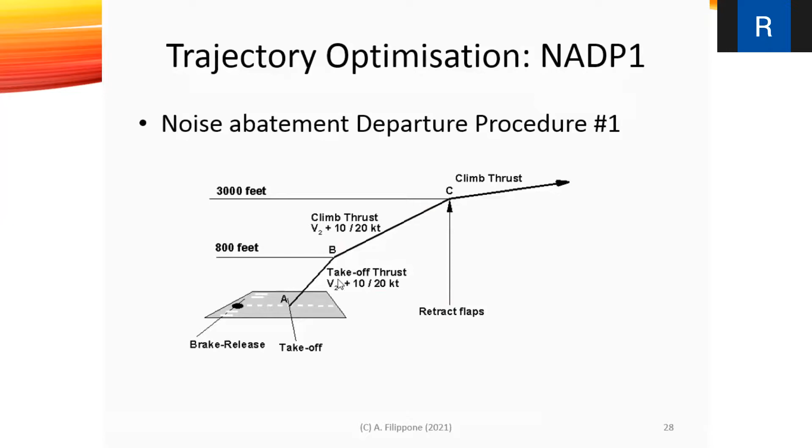In terms of optimization, there is a lot of science here. Again, I haven't got the time for this, but the search space for this optimization is non-convex, because the noise metrics are integrals in some form, and they're not differentiable. Therefore, when you have gradient methods, they often do not work very well, so we need to use non-gradient methods. Sometimes you use response surface sensitivity analysis to see, by changing certain parameters, what happens to the trajectory and to the noise.

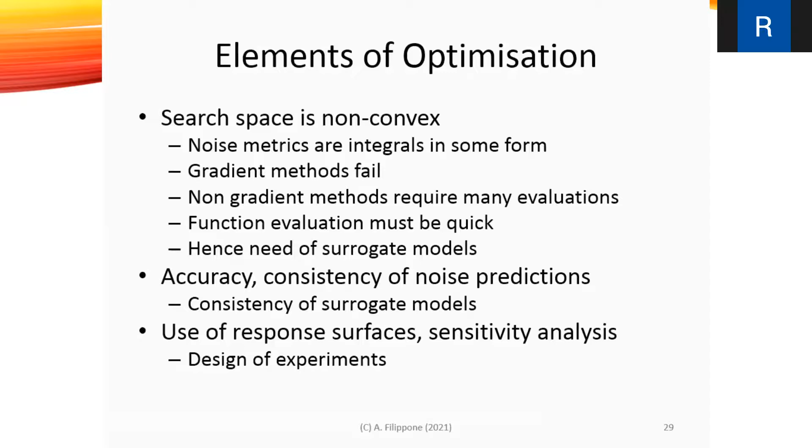Okay, I have to leave this behind, and anyone who's interested can get back to me on this aspect. So this is an example of a trajectory, a case study at Manchester Airport. We have an airplane, a 737. This is the airport here on the top right of the graph. The airplane essentially does what we call a SANBA 1Y routing.

This SANBA has nothing to do with singing and dancing. The airplane is not singing and dancing, but effectively what is required is to avoid communities to the south of the airport. This community here is called Knutsford. So essentially the airplane, as it's taking off, passes to the north of the town, and then does a southbound turn away from it, keeping distance that way. So it's a way of reducing noise.

Now, we've been going there to take measurements in the past at the point called M. A few years ago, I even sent a student to take measurements there, and we got some results. This is the Manchester Airport.

This is a public park, so to take measurements we have to ask permission from the park rangers. This is another interesting thing - when you try to take measurements of airport noise, you need to seek permission. The moment you seek permission, they ask what these are for. We've been asked so many questions so many times that sometimes we don't really want to do this, because we don't want to be viewed as proxies for complaints between the park authorities and the airport authorities. We just want to do scientific work here.

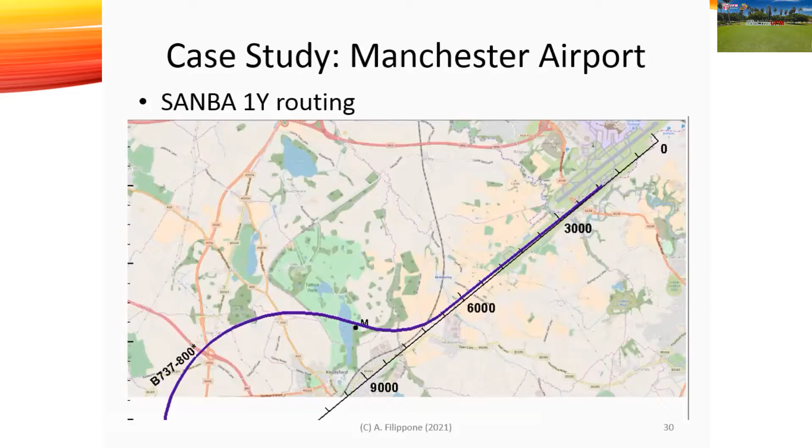This is a trajectory for the SANBA 1Y routing, southbound, where the airplane had changed routes. In doing some trajectory optimization, we've done this with three different types of aircraft, representing three weight classes. One is the Embraer 195, a commuter turbofan airplane used for relatively short flights - not really light aircraft, just a commuter. Then you've got the A380, the big beast, and the A320, the backbone of aviation.

All these airplanes are flying the SANBA route, but as you can see, there's quite a different trajectory. For example, the 195 is lighter, makes less noise, and can be required to maintain a shorter distance from this point - we have a reference point here in the town called Knutsford. The A320 is a mid-weight airplane, more agile, so it can do turns relatively easily, and you see the radius of curvature is quite small there. The Airbus A380 is a big beast, and turning one of those is slightly more complicated. So you see three trajectories which are completely different.

This optimization is done in two different ways. When you look at the solid lines, you have essentially minimum noise - minimum noise at the point in the town of Knutsford means a minimum EPNL value. However, we've also done a multidisciplinary optimization considering total minimum cost, which is minimum noise plus minimum environmental emissions plus minimum time if possible, subject to complying with safety regulations. The trajectories are slightly different, as you can see from the dashed lines.

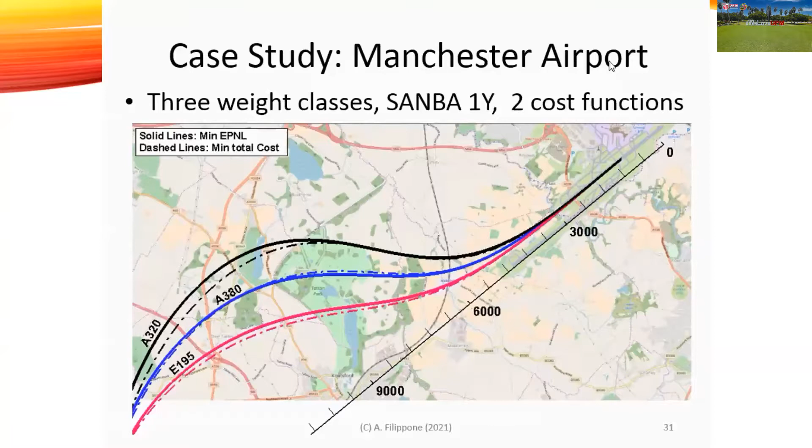Again, this is for minimum fuel consumption. Minimum fuel consumption, not taking into account noise at all, means you're doing a much sharper, more straightforward trajectory, and of course you get closer to the town of Knutsford because noise is not a constraint in this particular instance.

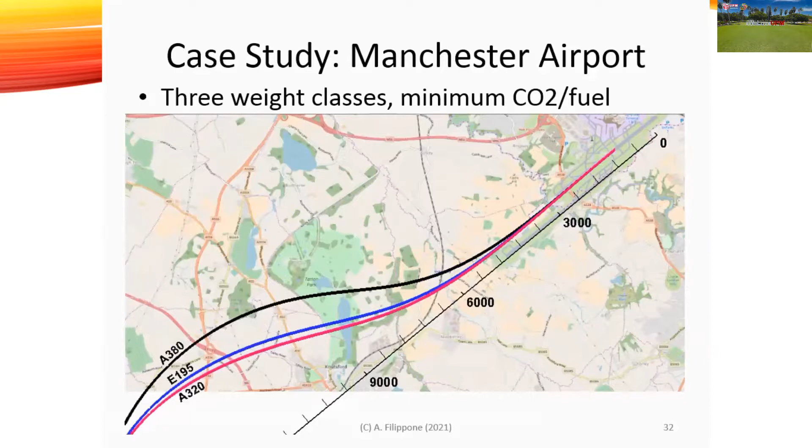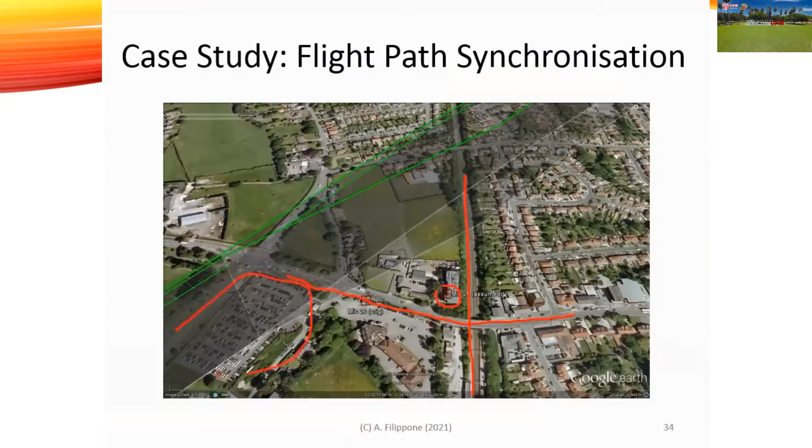Here is one of the large car parks of the airport. So one thing I mentioned earlier was that you can have displaced landings. Displaced landings are possible at airports which have very, very large, very long runways of the order of 4,000 meters. One example of this is Frankfurt.

So what you essentially have, instead of landing, the conventional trajectory is trajectory 1. Basically you land, so this gamma here is 3 degrees, and you land at this point here, which is called x equal to 0. So the displaced landing is moving the airplane to land over there. So if you have people over here, clearly the minimum distance between the airplane and the receiver before was like this, and now becomes like that. So by increasing the distance between the receiver and the airplane, you expect to reduce noise.

And the other thing you do, you have this steep descent, which is this trajectory named 3, which is a steeper approach, can be 4 degrees, can be 5 degrees, but this is only possible for relatively small airplanes. So the Airbus A380 wouldn't be able to land with that sort of trajectory there.

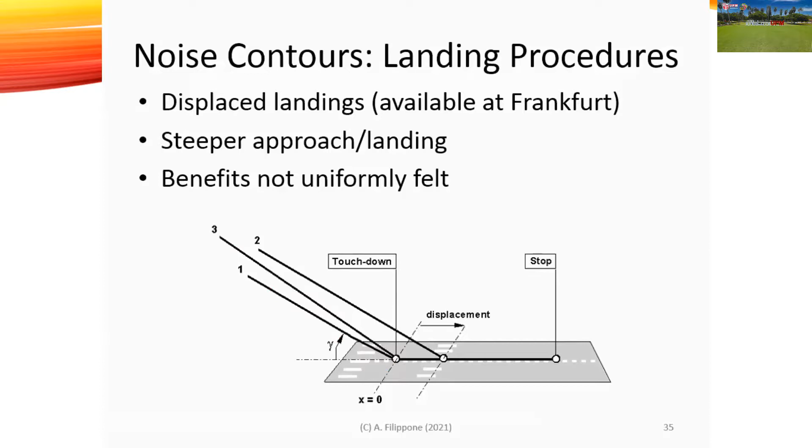So the last thing I want to do before concluding is that I didn't talk about the simulations very much. That would take me too long. But essentially what we need to do is this: we need to recognize that the problem of aircraft noise simulation is very complicated, and therefore we need to take an overall approach which takes into account the fact that the more you want to simulate, the more you need to leave behind. So what we do is we do a component analysis.

So we look at the noise of each noise component. Then we want to do aircraft noise. We look at noise events, and eventually the noise footprints, as I said, in the case of London Heathrow, to do some noise contours for multiple airplanes. At the moment, we're not able to do that because of extreme computational complexity.

Now, what happens also is that if you want to do component analysis, you can actually use physics-based methods. If you want to do the aircraft noise, you maybe need to go toward the semi-empirical methods. And then as you build complexity level, essentially the accuracy decreases. And you get to a point where if you want to do noise contours for the entire airport, for hundreds of aircraft movements, essentially you rely on an experimental database.

Here I call it the big data process, but it's not done like this, because what is used is an approach called NPD, which is noise, power, distance. So it's another area which is used, I would say, by the industry, but essentially would be the airports. So we don't really do this. Using databases in order to do this map. So we don't do this, but this is the way to just sort of approach these problems of extreme complexity.

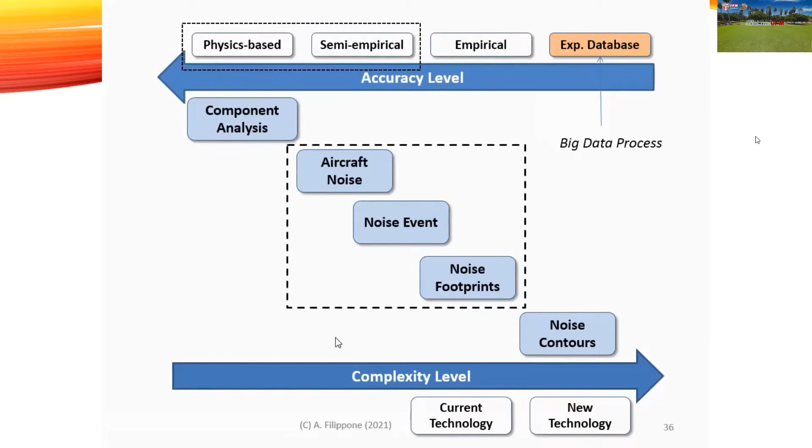And this is my summary. Aircraft noise is a major environmental concern. Regulations have been established for quite a few years, getting more and more strict. But there are no regulations in place for supersonic flight because there is no commercial supersonic airplane flying at the moment, maybe in the future. There are several aspects of psychoacoustics and engineering that need to be considered. Engineering is one thing, but you need to consider how people actually react to annoyance and so on.

There's very scant comparison between noise contours. Possibly there are legal implications because if you take two different models, it will give you different noise contours. And the robustness and reliability of the scientific methods have not been fully proved. So this concludes my talk, and thank you for listening to me.

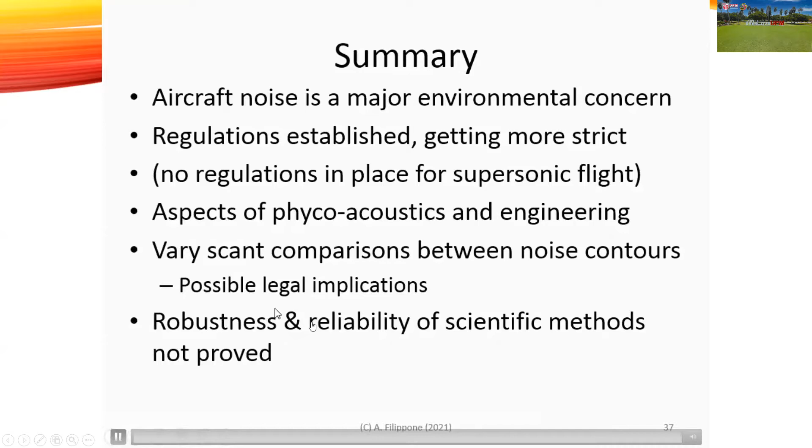That is the presentation by Prof. Filippone. So what do you think about it?

Did you understand about the aircraft noise? So you are lost somewhere? Okay, did you follow the presentation? Yes, Doctor.

Actually, I'm quite amazed that even the flight path for one aircraft is different from another model to another. So there are so many considerations to be taken when considering which path one aircraft will take. I always thought that it is the same for all the aircrafts, Doctor. No, but after this presentation, now I know that it's different for each model.

And that is also important, especially not only during takeoff, but the same consideration is also taken for the highway in the sky, because we have hundreds of aircraft, right? Hundreds of aircraft, or even thousands, I'm not sure, flying above us now. So there are different trajectories, different altitudes given to specific aircraft, so that it is safe. That's one, as well as to allow the control tower to monitor each aircraft easily, those aircraft within their territory.